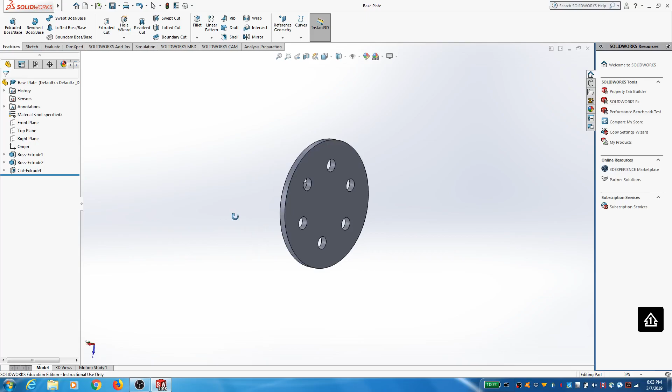So I have a part here, we're calling it a base plate. Basically it's a thin plate with holes on a circle. These are 6 holes evenly spaced around a circle. And then we've got this extruded piece that has a blind hole so it doesn't come through to the other side. So that's our part.

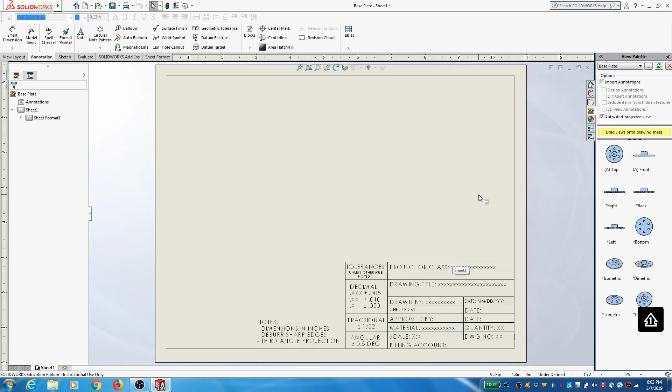It's in English units. So now let's go ahead and make a drawing. I'm making sure that I am loading up the UD template here. There it is, and I'm going to go ahead and pull in some views.

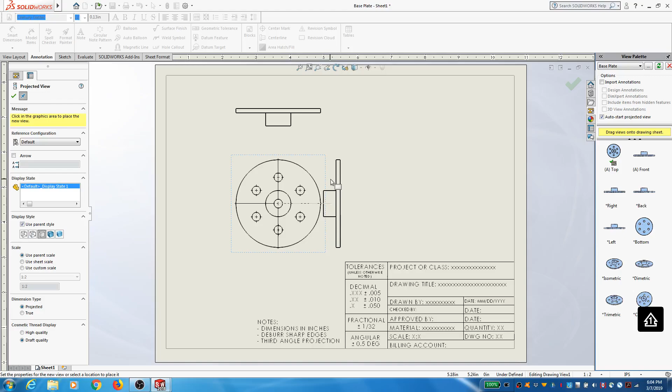The way that I drew this part, my top view is actually what I want as my front view. It'll make the most sense. I'm not actually going to create 3 views here. Usually with circular parts, this other view is super redundant, so I'm going to just let that be. I am going to have an isometric, I'll go ahead and pull that up.

I'm going to move things around a little bit, give myself a little bit of space. I am okay with you guys, in these types of instances where you don't have a third view, pulling this isometric down a little bit to give yourself more space. Again, we're shooting for clarity. So if you don't have that third view, it does not need to be at a perfect 45-degree angle. I'm okay with that. Alright, so let's fix a couple things about this.

First, I'd like to turn on the hidden lines, make sure those are showing up in the views. I'm going to get rid of them on my isometric, but I definitely needed them over here. I also want to note that my scale, what it pulled up on the sheet, was half scale, so basically this is half the size on paper that it is in reality, and that's totally fine. So I'd make sure my scale says 1 to 2 here when I go and edit my template.

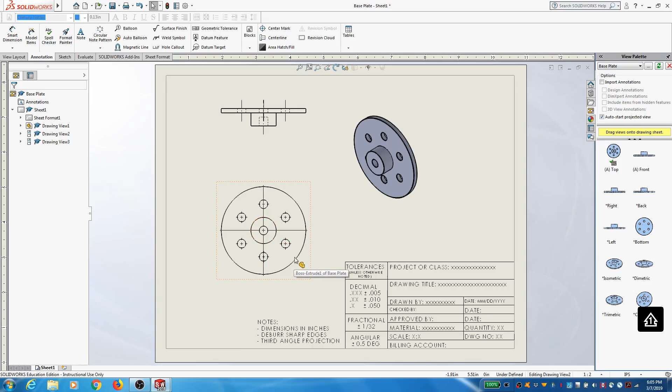That's what I want to fix there. I need to fix my isometric again, so I'm going to go ahead and do that. And then I want to add in center lines, so I'm going to select the view, and it went ahead and added those in, and that's great. I am not happy with how this all showed up over here.

So what I'd like to see, similar to what we've looked at in class, is that these center marks here are on what we call a bolt circle. Basically, the way this would be made is that you would, and it's easiest to specify on a drawing, have these holes laid out on a circle with an even spacing. So I'm going to delete all the center marks that were put on there automatically, and I'm going to put on my own center marks.

And this is going to get us into some of the more advanced options of center marks. So we're going to click on center mark. I'm going to go ahead and do a couple things here. First, you'll notice we've been using center marks as the default, like, hey, I want to lay down a center mark. That's fine, like I would do for here. I just got an X and Y that I'm trying to locate.

But this guy here, we don't necessarily want to locate on X and Y. We want to locate radially. So I'm going to go back and delete this guy. I'm going to leave this one in as is, but go back to center mark. And I'm going to select this guy here, which is going to allow me to go from hole to hole to hole, and eventually it should pick up that this is all on a circle, and lay down center marks that make sense around that circle.

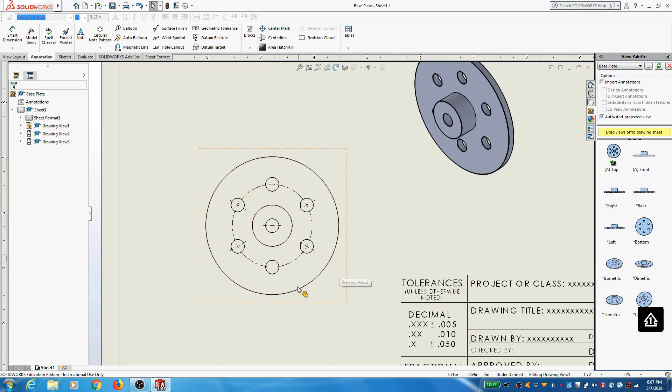So it added in this bolt circle, and that is great, that is what I wanted. I also want to tidy up these lines a little bit. I'm super particular, due to some level of drafting knowledge in my formative years, about how these lines look. So I don't like big, long center lines here. I want them nice and tidy and not cluttering up the rest of my drawing.

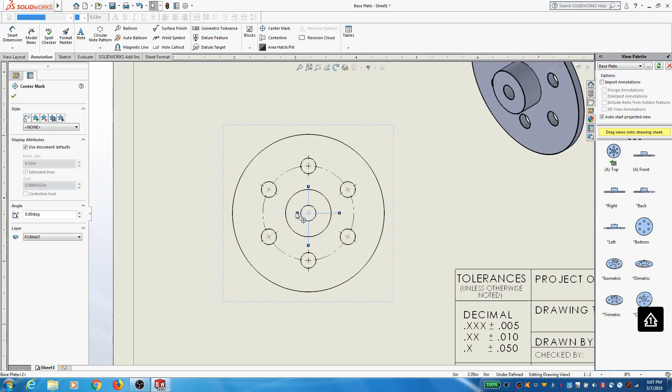Okay, so I'm happier with this. It's very clear where my center lines are and are not. I might go ahead and extend this guy just a little bit. I'm going back and futzing here. But I want to make it absolutely clear that these 2 circles are concentric. Okay, so I've got a couple things here. Let me go ahead and complete the drawing.

Let me start with this outer circle here. I'm going to use my Smart Dimension and deal with the big features here. So this is diameter 5 inches. I like that. I like the way that it looks, okay?

Notice that my diameter symbol is coming up. That was a problem I think you guys won't face. You saw in part 2 I was struggling with that. This is due to the fact that I just switched over to SolidWorks 2018 and it was trying to read the symbols file from my prior SolidWorks version. So you guys should not have that problem. If you do, immediately call a TA over and we'll see what we can do about that.

But that problem of getting these symbols should not occur for you. Okay, so we've got our outer one, and now let me do this one here, which I'd also consider to be a major feature. I'm going to do this guy, okay, and they're concentric.

I'm going to do now my thicknesses here, right? I'll go ahead and dimension those. The place to do that would be off of this. And I'd probably do it as additive here because really the way this would be made is either two parts welded together or I would lathe down these thicknesses.

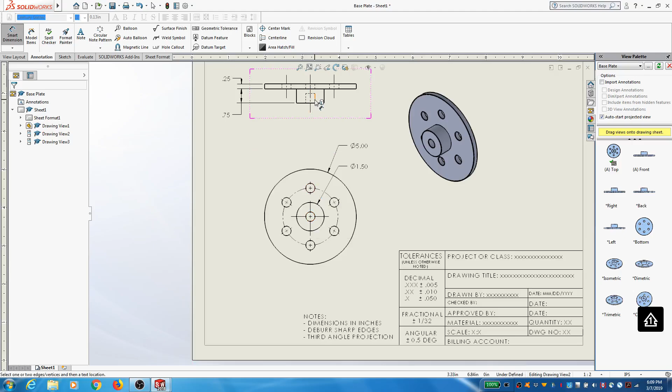Now we've got this hole to deal with, and this is what we call a blind hole, right? So this hole is going to go down to only a certain depth. It's not going to go all the way through the part. So there are a couple ways to dimension this.

I'm going to dimension first just with the Smart Dimension tool and edit. So if I were to do this, maybe I'll come up here. Once you have radial parts, there's a lot of clutter, so don't be afraid to pull these off in different directions. Okay, so it's a 0.5 diameter, but I need to give some more information, right? I would prefer not to specify the depth of this hole off of the top drawing because that would come off of a hidden line. So I would use the depth symbol here, depth, and then I'm coming down 0.5.

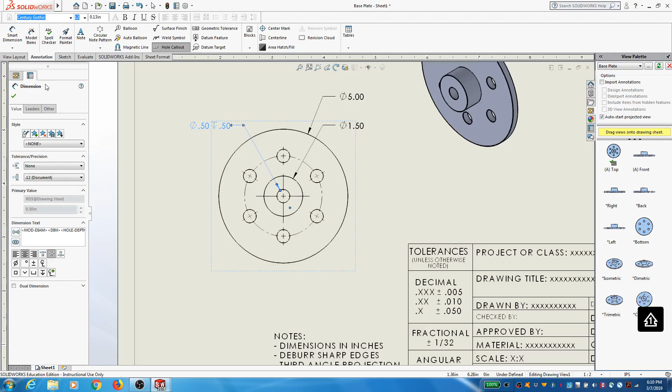Okay, so that's one way to put this in, is to add on to the auto dimension that's happening. The other would be there is something called a hole call-out feature that tries to take a guess, your best guess at what's happening with a particular hole. So if I do hole call-out, you sometimes have to edit this, sometimes it is not what you want, but 0.5 to depth 0.5. Okay, so that's just this hole call-out feature, and that's good. So in that case, it's perfectly correct.

All right, so we've done sort of the outer parts, we've done this hole, now we just have to deal with these guys. Okay, so there are a couple ways to do this. I am going to do it with a single Smart Dimension coming off of this and editing. So now I'm going to say 6x evenly spaced, all caps, evenly spaced.

And my bolt circle, I believe is - I've got to actually check that, so I'm going to go back and remind myself what my bolt circle was here. That is a radius of 0.75, which would be a diameter of 1.5, and I'd probably specify that as a diameter.

Okay, so I come in here, 6x, evenly spaced. I might move my 6x up. Leave evenly spaced on that line. And I now want to say diameter 1.50 bolt circle.

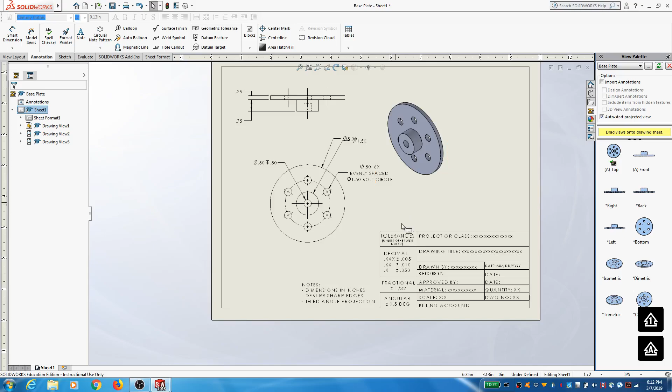Okay, so this is one way to note it. All right, that would be the preferred way to call it out for the shop. Okay, so now I'd like to show off one other little feature here. Note that our dimensions are getting a little cluttered, so I'm going to go back and fix those a little bit.

I want to show you guys that Smart Dimension can do angular measurements. And I wouldn't include this on the drawing because the evenly spaced takes care of 6 holes around a 360-degree circle, right? So you're going to have 60 degrees in between. So I would just like to show you that these 2 holes are 60 degrees apart on that circle and how to do that on Smart Dimension.

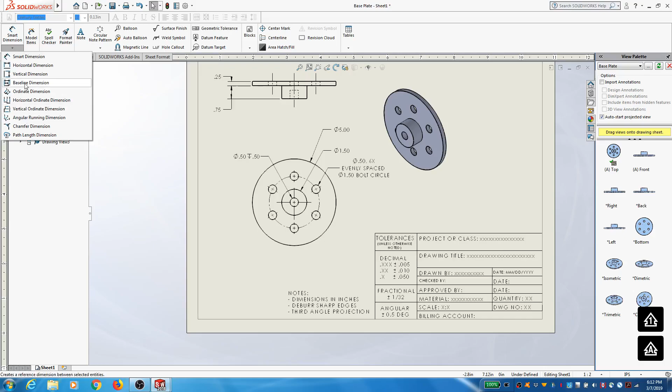So should you need an angular measurement, you are able to do that. Smart Dimension generally picks it up, but if it doesn't, you would need to go to angular running dimension. But let's see if Smart Dimension can, if it'll make me happy here. There we go, 60 degrees, okay? So you do have the option here of laying down an angular measurement. All right, that's all that I wanted to show you. That's part 3 of 3.